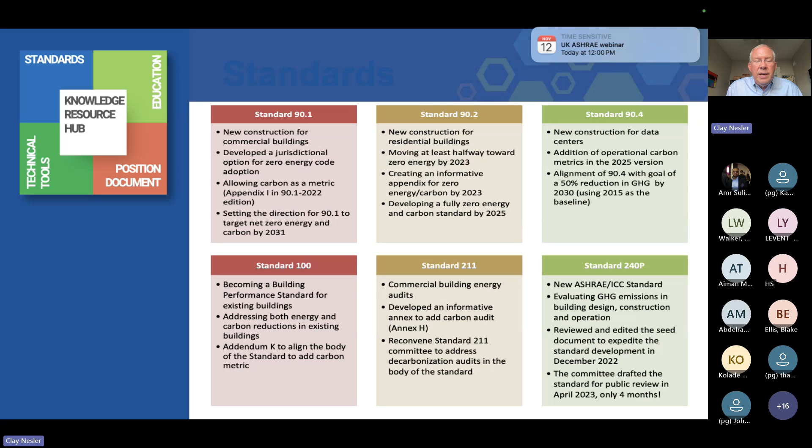So let me just briefly talk about the challenge. The IEA has a very strong focus on buildings and always have. I served on their industry advisory board for a number of years.

In their net zero scenario, they specifically state that all countries will have to implement national building codes, which they view as one of the key levers towards meeting a net zero carbon scenario for the planet, along with enabling policies and programs that rapidly shift the market towards deep energy efficiency, which ASHRAE has obviously been interested in for 130 years, zero carbon emission targets, electrification of heating, renewables integration, and demand flexibility.

They go on further to provide greater detail on what those targets need to be, such as space heating and cooling needs to fall at least 40% and 30% by 2030 compared to today. And fossil fuel heating will have to be largely, perhaps not completely, but largely phased out in new construction starting in 2025. That's very consistent with the ASHRAE position that new construction in the built environment on a global basis should be net zero or net zero ready by 2030.

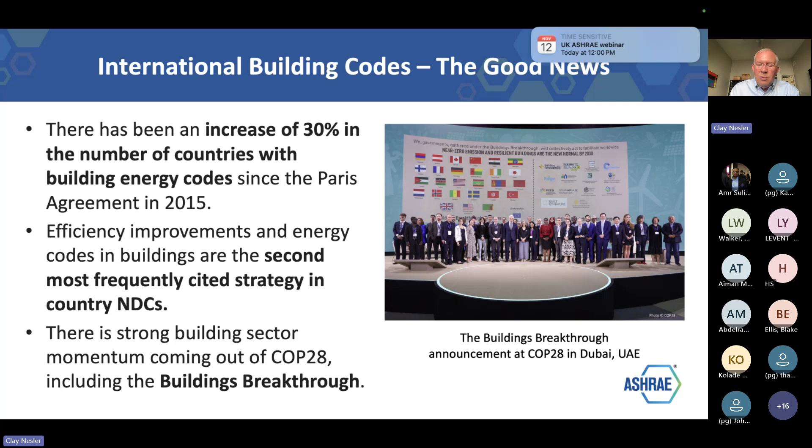And there's strong building sector momentum, including last year, the Buildings Breakthrough was announced, and here's a picture of those at the COP announcing that important new initiative with wide global acceptance. So that's the good news.

The bad news: at this point, only 26 percent of countries have adopted mandatory energy codes at the national level for all building types. Now that's a pretty high bar, all building types, residential, commercial, at a national level. But a quarter isn't going to get us to the goal.

2.4 billion square meters of floor space were built last year without meeting any energy-related performance requirements. They were just built. Some are great buildings, some aren't so great. But without regulations, it would be hard to predict that most of those buildings are up to the highest practical, cost-effective standards. 82% of population growth through 2030 is in countries without energy codes. So that 82% of the growth is without those performance requirements encoded in law and regulation.

Actually, since 2010, even though we have improved, we've improved only 7%. And if you've seen the projections of the IEA and the World Bank and others, we need to go a lot faster than 7% in 13 years.

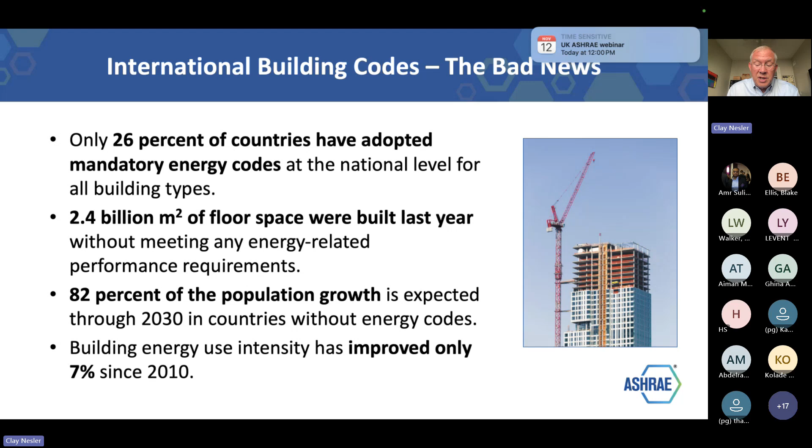In fact, part of the Buildings Breakthrough is a commitment to double the rate of energy efficiency improvement over the next 10 years. Last week, there was a report that we didn't do it. We're still about 1% improvement per year, and we should be at 4% per year. We have a lot of work to do.

So these are some nice charts that I couldn't possibly generate, from the World Bank, that give you some visual indication of which countries have some standards, a unified building energy code, and where we have almost no data. 88 countries have mandatory codes in at least one city, and 54 countries have some standards, but 55% of building codes haven't been updated since 2015. Eight years, over half the countries haven't advanced or updated their building codes.

With respect to stringency, just looking at building envelope as one obvious area for building codes, you see an awful lot of gray there, but 70 countries have requirements for building envelope, 54 with requirements for HVAC, and 60 for water heating and lighting.

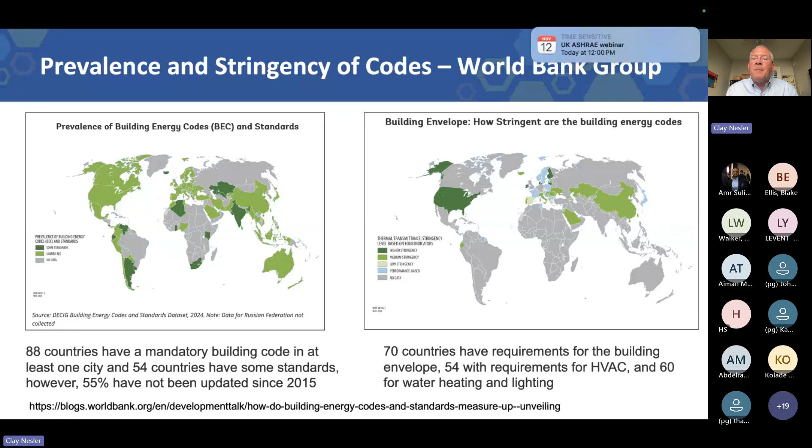ASHRAE noticed this, and at COP28 in Dubai, our president at the time, Ginger Scoggins, attended a press conference where ASHRAE announced this new initiative that I'm describing today.

She's quoted as saying, 'We're retooling the focus of our existing standards to address embodied and operational carbon,' which is certainly the way the world seems to be going. Yes, ASHRAE is about energy efficiency, but much more than that. ASHRAE is building on 90.1 to create a streamlined, flexible building standard framework to help countries in the Global South develop their own consensus-based building codes, with the target being achieving zero carbon ready by 2030. So that was the public announcement of the initiative that I have been working on ever since.

So what have we heard since we announced this, and the basis for the announcement? This is what we've heard around the world at regional meetings, at CRCs. We have a global advisory panel for the ASHRAE Center of Excellence, and we've heard these over and over again, and we're absolutely taking them into account as we plan for the future.

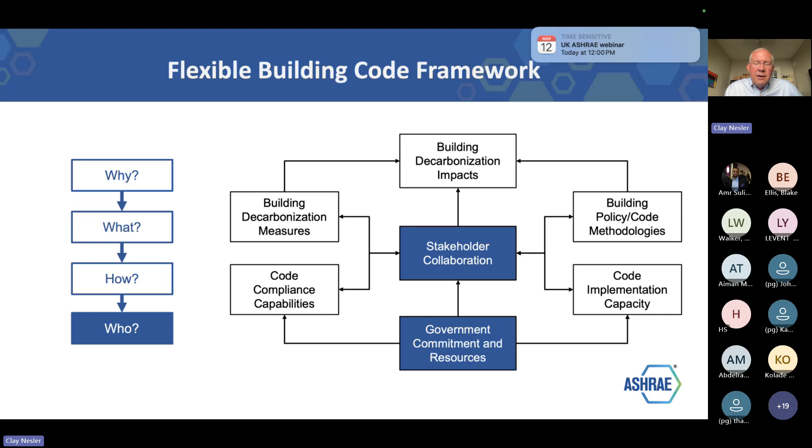Who? Well, it has to be stakeholder centric. We need all the right people in the room. And I've got a case study later that I'll talk about where I think we did that in a very positive and productive way. And the government needs to make commitments to the policies as well as to the resources necessary. Now, let's dig a little deeper.

So the beginning is to identify those outcomes, whether they be environmental, economic, resiliency, health, safety, workforce development, supply chain, you name it, and figure out what the priorities are.

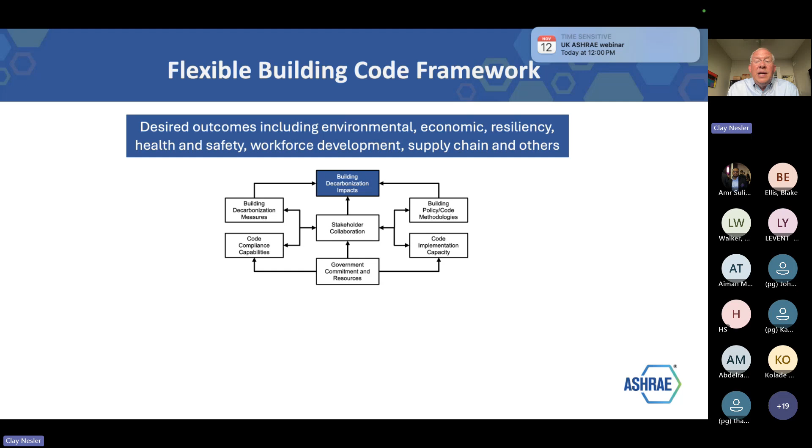We have some experience within ASHRAE of doing this. I don't know if many of you have heard of the decarbonization strategy game, but it was a tool which I actually developed about a year and a half ago, which leveraged the expertise of the Task Force for Building Decarbonization to essentially be the survey body of and evaluate both needs and best practices in building decarbonization. And then we took that information and created a game where everybody goes through and evaluates these things.

And the closer you match to the priorities of the TFBD, the better your score. And if you have the top score, you win a prize. At the ASHRAE meeting in Tampa, that was a plastic little Barbie doll size heat pump.

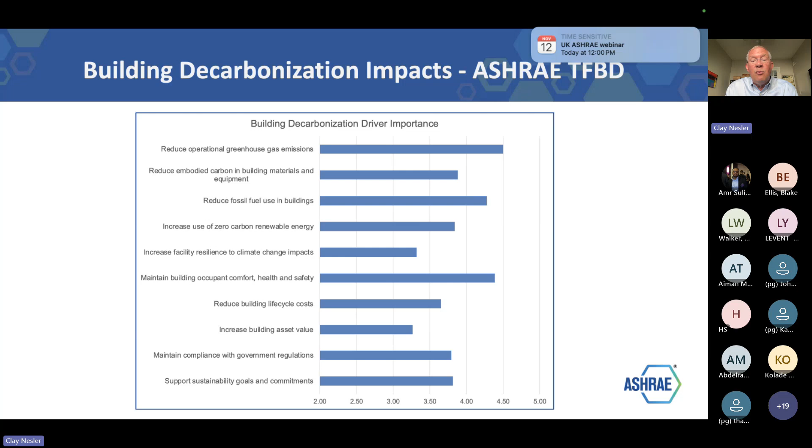But anyway, here's just an example of a range of drivers that cover both environmental, financial, and other things. And this is what the TFBD prioritized them at the time. Something like this would be done in the target country with the stakeholders to get an assessment of what's most important and who thinks what is most important.

The next part of the framework is really a focus on the building technology measures. That's the world we live in most every day, and includes the best practices across building planning, design, construction, efficiency, electrification, renewables, operational measures, and other things that are specific to a given country.

Two references that we've used in pulling together this component of the framework. One is Decarbonization Pathway from the World Bank. They described a stepping process that goes from introducing basic passive design requirements like building envelope and lighting and things through, and then introducing the enforcement mechanisms on those basic passive elements, to tightening efficiency, replacing fossil fuel with electric equipment, introducing circularity and embodied carbon, and then finally ending up with requiring net zero carbon building standards.

That's a very logical pathway. We described something very similar in ASHRAE's position document. Here's a little bit more detail. If you double click on some of those elements, you see specific technical measures.

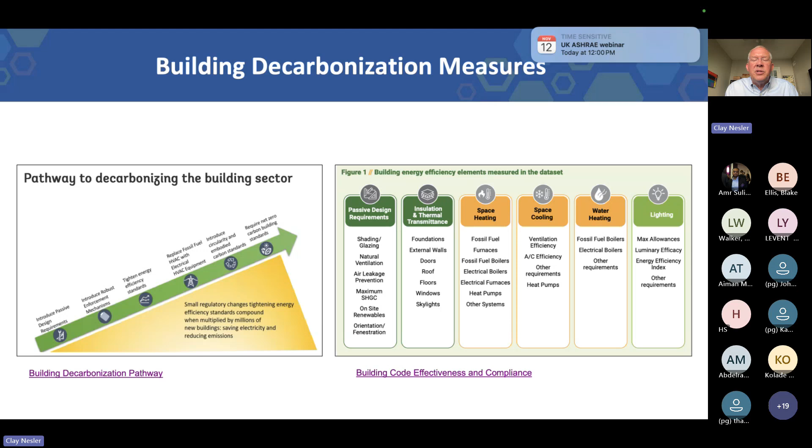These can all potentially be integrated into building codes, but while this map may be considered somewhat authoritative due to the expertise of the task force, it needs to be the map for the given country and their stakeholders and where they are and what's important to them in their climate and the politics of the day.

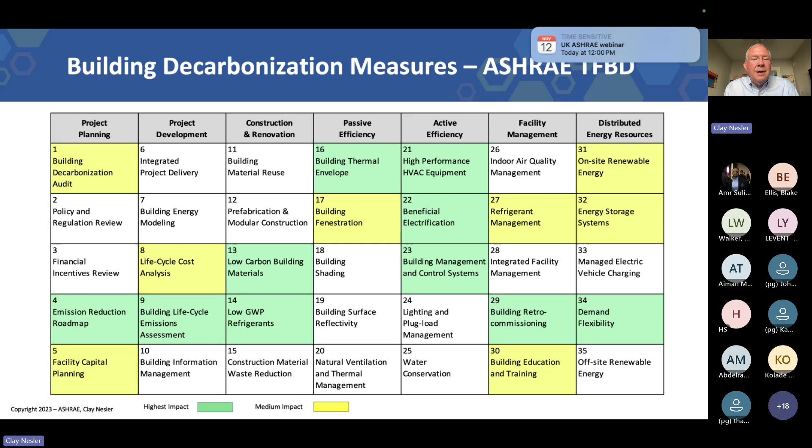So just an example that I think we know how to do this. We need to make this accessible for more than just a game, but to actually use as a tool to develop codes.

Next is policy and code methodologies. Even if we had a solid list of which measures we want implemented in the future to improve decarbonization, there are a myriad of ways to put those into a functional code, including prescriptive, thou shalt do it this way, performance, don't care what you do as long as it delivers performance. Hybrid codes are increasingly popular where some elements like the envelope are prescriptive, but others are performance-based.

Will it apply to new existing buildings? Will it be based on energy or carbon? Will there be incentives and permitting things linked to the codes to drive adoption. Will the government use the codes in their own facilities?

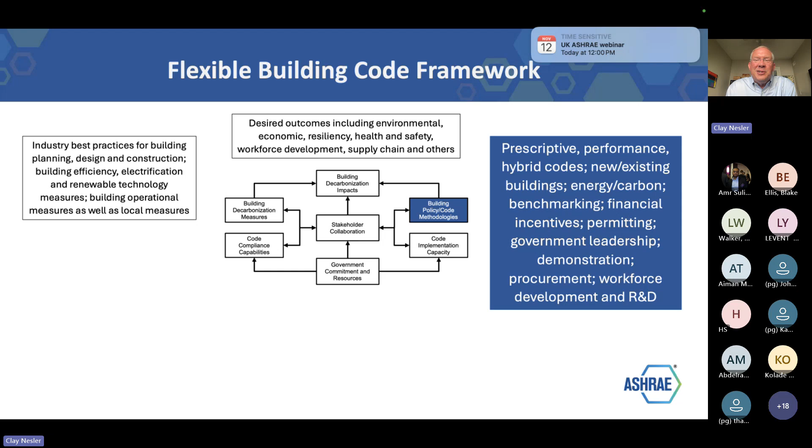So here's just a thought experiment. We could come up with infinite variation on this. There's 196 or whatever countries, I'm sure I'm off by one or two. But you know, for instance, a country's first code could focus on commercial office and then in the future incorporate multifamily. We could focus solely our efforts on the framework for hot, humid climates. We could focus on envelope and cooling initially and then add lighting controls later. We may or may not include solar as a requirement for every new construction. We could focus on refrigerants because we love them and because they are important, 2+% of global emissions in the built environment.

And to simplify things, we may focus on energy initially. It could be a hybrid code. We could do training and education or make recommendations and materials for architects, engineers, building owners, and code officials. Benchmarking and incentives are generally a way of driving code adoption and success. And then government needs to step up and demonstrate these technologies in their own buildings and procure according to their codes. That's a very reasonable approach. And one example, I think, is...

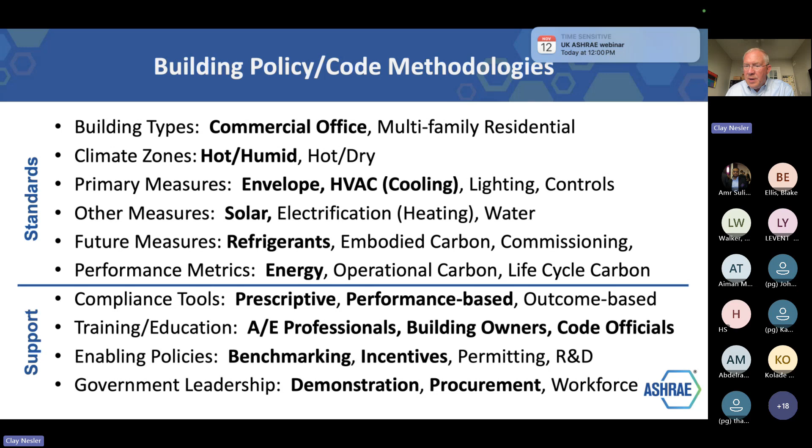Next is a real focus on code implementation and compliance. This is a topic all its own, but it's incredibly important for the success of codes and for confidence in the codes and the ability of the industry to adapt, and the demand from building owners to require this as part of their projects.

Luckily, there's a global group that has come together to develop a tool - a definitive tool, if you will - for building capacity for sustainable and resilient buildings. This was part of the Buildings Breakthrough, the picture I showed before with all the people on the stage with all the country flags. This is the bottom half of our framework. ASHRAE is one of the first signatories to this commitment for building capacity in building codes, along with a number of other organizations you see there - some of the largest A&E firms, as well as civil society and Architecture 2030 and things like that. So we hope to rely mainly on the resources that this group is pulling together, and we are part of that overall development team.

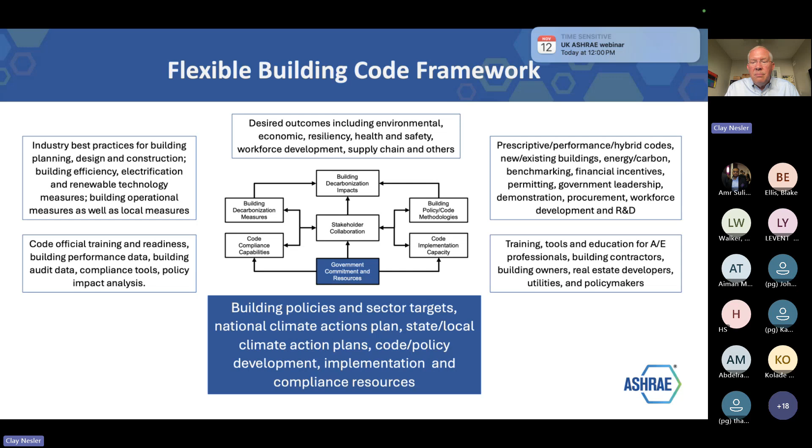And then finally, government commitment and resources. Obviously the government needs to support it, but it's more than just saying, yeah, you can go do this if you want - they really need to drive it. It needs to be important. It needs to be part of their global policies and their regulatory agenda. So it's not just money, it's not just people, it's not just commitment - it is also policies and putting in things that help support the building codes. Building codes alone would be helpful, but not as much if they were combined with other things.

It turns out of all the government policies in transportation, industry, agriculture, buildings, vehicles, whatever, building codes scored among the highest in their potential to actually have a positive climate impact, and were singled out as one of a handful of policies among 50 or 60 different policies.

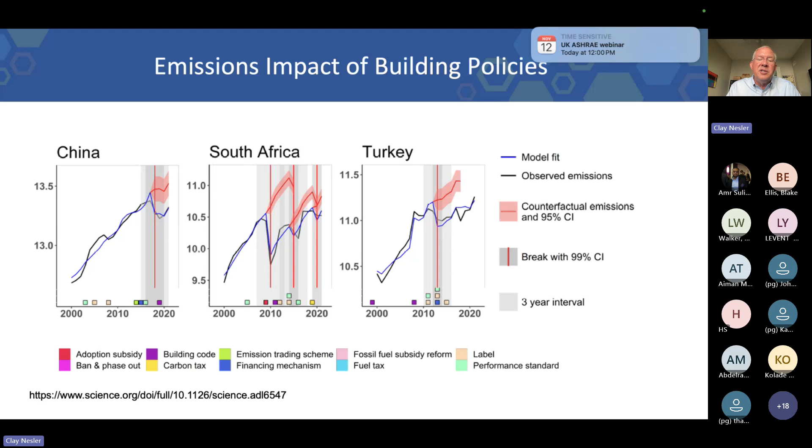What Bogota wanted to do, in order to advance their own goals, was basically start from scratch and develop their own city building code that would be consistent with the regulatory language but have a greater impact. Over 18 months, the World Resources Institute and the Green Building Council of Colombia, called CCCS, worked with a large number of stakeholders to assess what needed to be improved. They developed a model code locally applicable to Bogota, a high altitude city at 8,000 something feet.

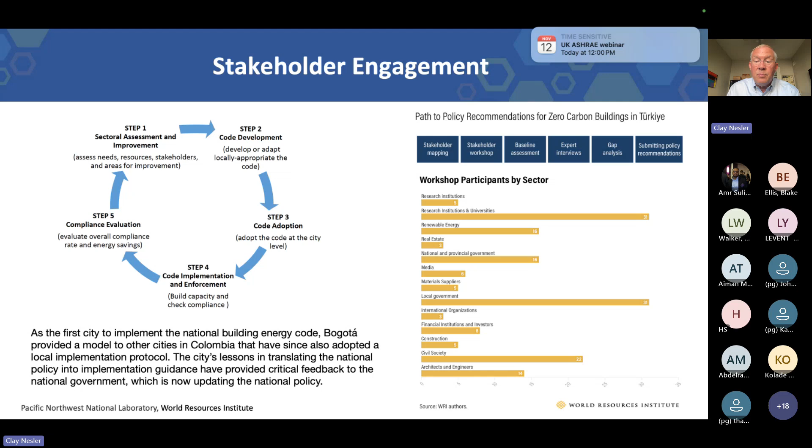This was to improve the building codes in Turkey. Gaziantep and a number of other cities got together and wanted to improve their building sector emissions. This gives you an idea - roughly 50, almost 100 stakeholders were involved in the development. They produced a zero carbon buildings roadmap with short and medium-term goals to drive further improvement in Turkey, which already had building codes, by the way.

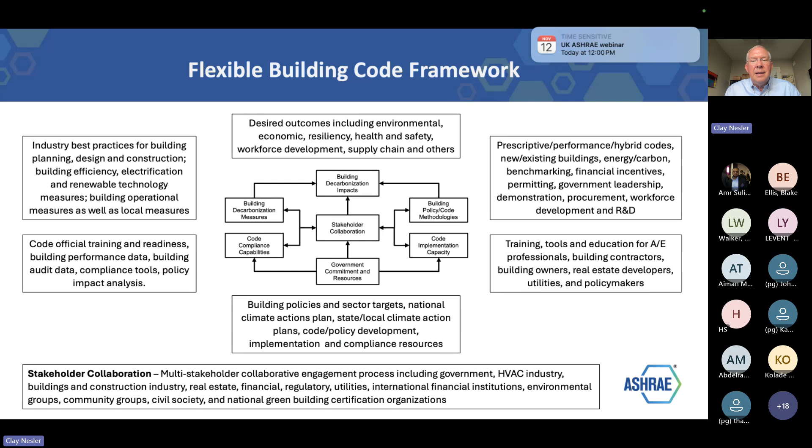All right, so this is the chart - I guess you could call it a placemat, maybe. There's a lot of text on it, but this is the overall framework we're looking at, putting tools, checklists, guidelines, and processes around it to be able to work with countries.

Here's some additional building code resources. Some of the data I showed comes from two excellent documents from the World Bank: the Building Code Checklist for Green Buildings, and the Global Data Set on Building Code Effectiveness and Compliance. IEA is also working on a project - they've been tracking building code attributes for about, I don't know, probably 10 years. They're working to put that together into a tool which could not only benchmark the content, stringency, and performance of various building codes, but also provide guidance to countries early in the path towards developing more advanced modern building codes.

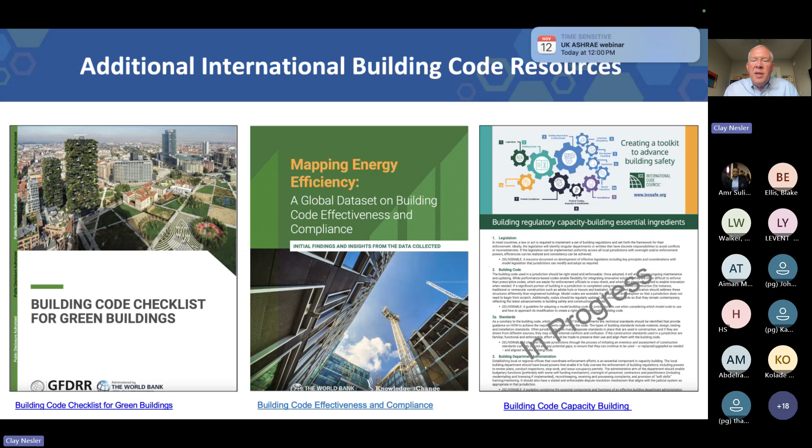This is a page from the proposal from the ICC and the Building Breakthrough project that we're involved in, so that's work in progress. I think we'll see that sometime over the next year, and that'll be a great resource. So, next steps.

Good news here. The stage we're at in the project is to develop joint work plans with our collaboration partners. This is not something ASHRAE can do alone. No individual company could do it. Nobody can do this alone.

In the last two weeks, we learned that the IEA Energy and Buildings and Construction Building Codes Working Group, led by Pacific Northwest National Lab in the US but incorporating members from Australia, New Zealand, Canada, many IEA countries, and institutions from a wide range of countries, is making this one of the key deliverables over the next year for that working group. So we'll be working with the IEA partners to document a knowledge product around the framework.

We just learned within the last week that the United States Department of Energy has agreed to fund a Net Zero World program, where they work with countries to decrease carbon emissions through various sectors. They announced that a program, which ASHRAE is part of, focused on Indonesia, will also focus on flexible building codes. Indonesia has a building code but has plenty of room for improvement, and it's a huge country growing very quickly, so focusing effort there can have a really big climate impact.